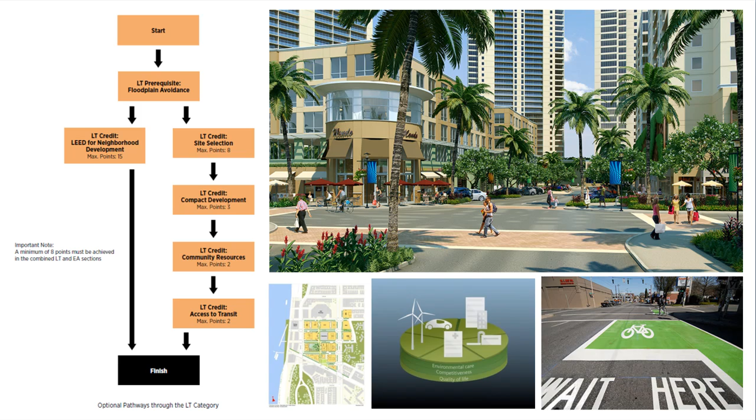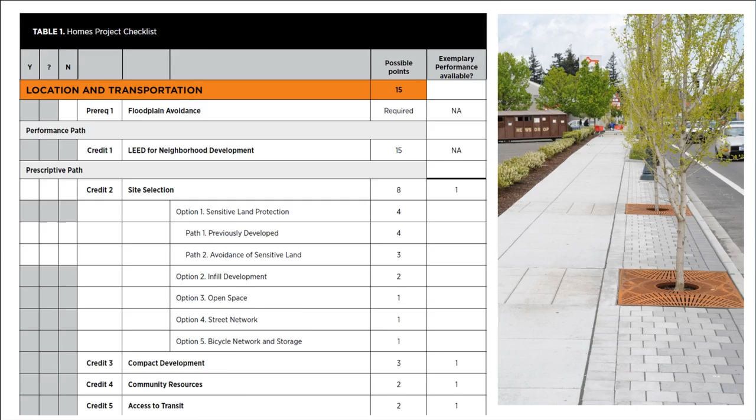This is the Homes project checklist for location and transportation. It has 1 prerequisite and 5 credits. Now we will start with prerequisite 1, the floodplain avoidance. Floodplain avoidance. Intent: to reduce the environmental impact of the development footprint. It is prerequisite or required.

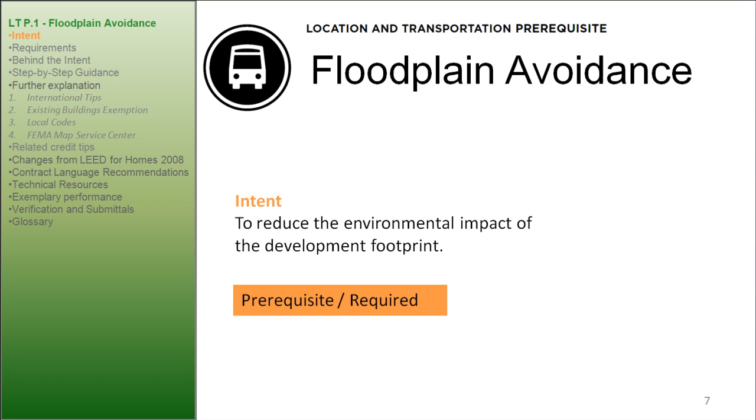Requirements: do not develop buildings on land that lies within a flood hazard area shown on a legally adopted flood hazard map, such as the Federal Emergency Management Agency or FEMA 100-year floodplain, or otherwise legally designated by the local jurisdiction or the state, unless the building is designed and built in accordance with the flood provisions of the applicable building code, the local floodplain management regulations, or at a minimum, the National Flood Insurance Program requirements.

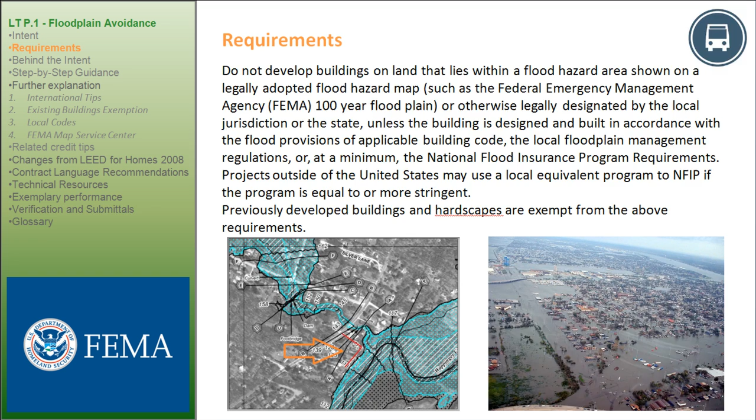Projects outside of the United States may use a local equivalent program to NFIP if the program is equal to or more stringent. Previously developed buildings and hardscapes are exempt from the above requirements. This is the example of Presidential Disaster Declarations from FEMA.

Behind the intent: flood damage causes long-term durability issues and diminishes indoor environmental quality. The restoration and reconstruction of damaged buildings generate large amounts of waste, and demolished buildings squander resources while adding to landfills. Floodplains also provide important ecosystem services and habitat.

The prerequisite encourages the complete avoidance of floodplains due to these important ecosystem benefits, but acknowledges the need for a solution when avoidance is infeasible. In this case, properly designing homes to resist flooding is required.

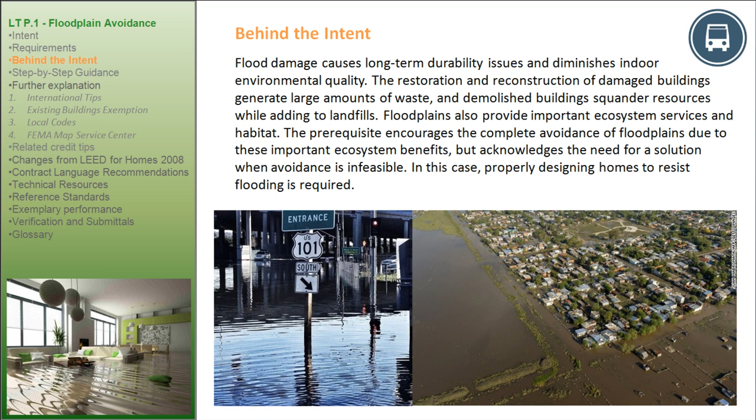Step-by-step guidance. Step 1. Map floodplain. Determine whether the site is in a 100-year floodplain, also known as a 1% flood, or in another legally adopted flood hazard area, such as an area of special concern designated by the municipality or state. In the U.S., the Federal Emergency Management Agency or FEMA maps most areas subject to a 1% annual chance of flooding.

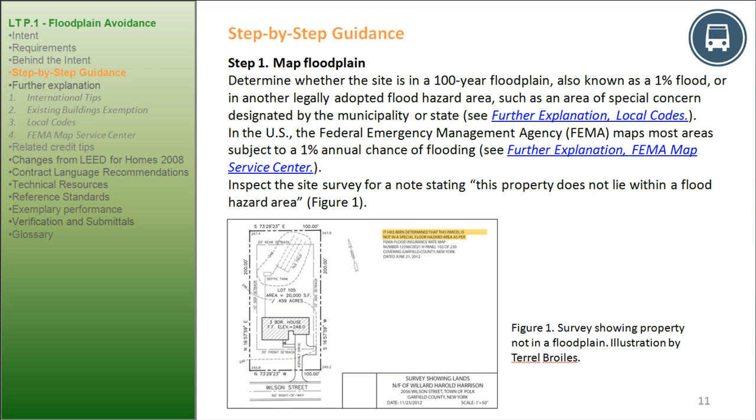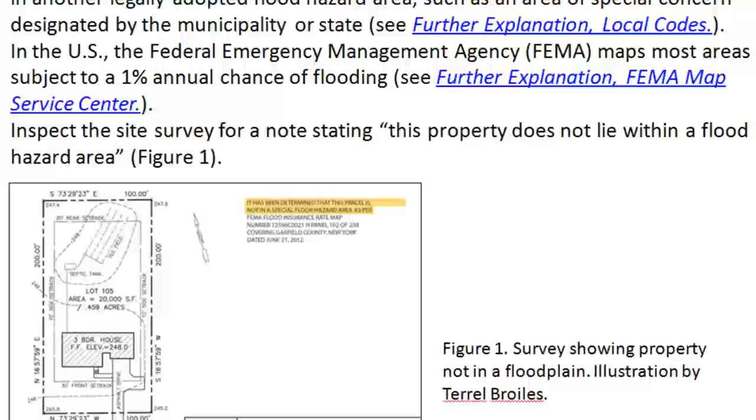Inspect the site survey for a note stating this property does not lie within a flood hazard area. See Figure 1. Figure 1 is a survey showing property not in a floodplain. Illustration by Terrell Broyles.

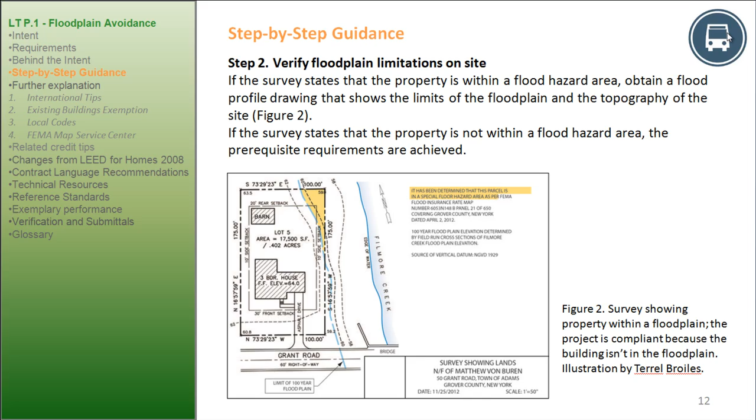Step 2. Verify floodplain limitations on site. If the survey states that the property is within a flood hazard area, obtain a flood profile drawing that shows the limits of the floodplain and the topography of the site. See Figure 2. If the survey states that the property is not within the flood hazard area, the prerequisite requirements are achieved. Figure 2 shows a survey showing property within a floodplain.

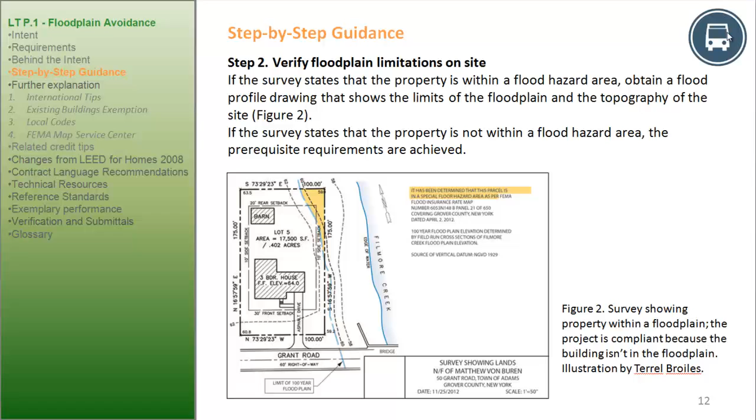The project is compliant because the building isn't in the floodplain. Illustration by Terrel Broiles. Step 3. Within floodplain: design for flood resistance. Strategy is to raise all finished floor areas and mechanical and electrical equipment above the floodplain. All spaces at or below the floodplain must be non-habitable areas that can withstand flooding.

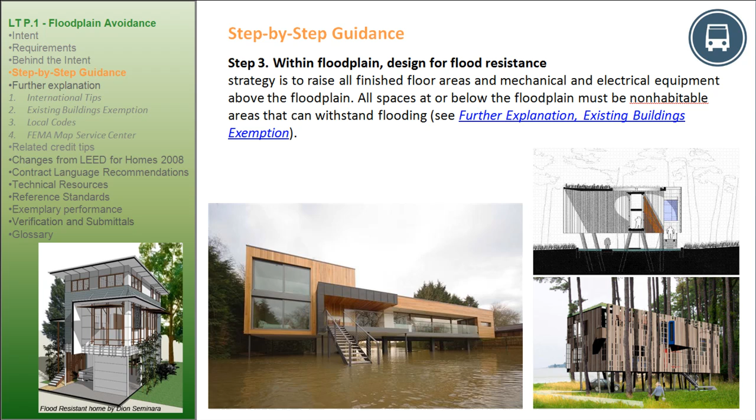See further explanation, Existing Buildings Exemption. We will now proceed to further explanation. International tips. FEMA is administered by the U.S. federal government. Projects outside the U.S. can use an equivalent program administered at the national level.

Projects are encouraged to use ASCE 24, which is applicable to projects outside the U.S. Project teams may need to retain local civil engineers or hydrologists who are licensed or certified to delineate floodplain boundaries. Most local, regional, or state jurisdictions, both inside and outside the U.S., maintain flood hazard maps. Projects outside the U.S. may refer to existing up-to-date flood maps for their project area or create their own maps based on expert information.

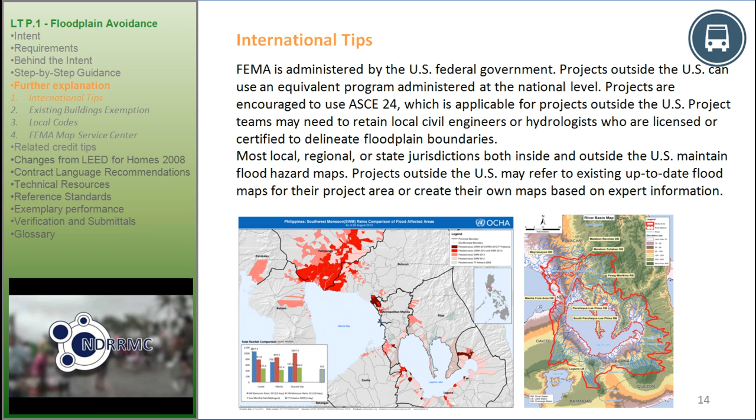Still on further explanation, Existing Buildings Exemption. Existing buildings located in a floodplain are exempt from the prerequisite requirements. USGBC recommends but does not require that existing buildings in floodplains elevate the finished area above the floodplain through one of the three following actions.

1. Extend the walls of the house upward and raise the lowest floor. 2. Convert the existing lower area of the house to non-habitable space and build a new second story for living space. And 3. Lift the entire house with the floor slab attached and build a new foundation to elevate the house. See the FEMA guide Above the Flood: Elevating Your Flood-Prone House.

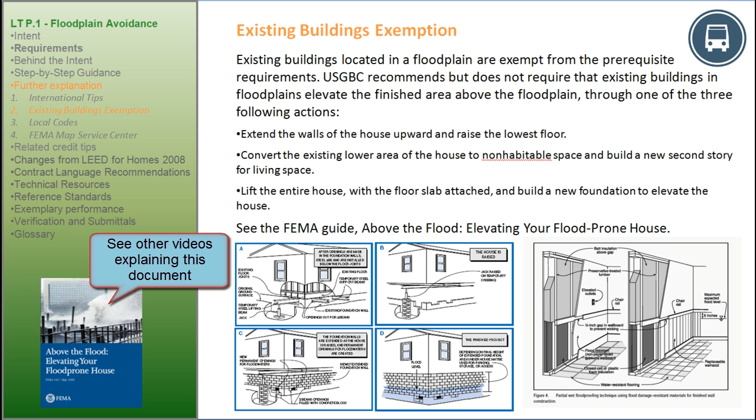Still on further explanation, local codes. Local jurisdictions have specific requirements for building in or near floodplains. This may include placing finished floor heights 4 feet or 1.2 meters or more above the base flood elevation and not installing any mechanical or electrical equipment below that elevation.

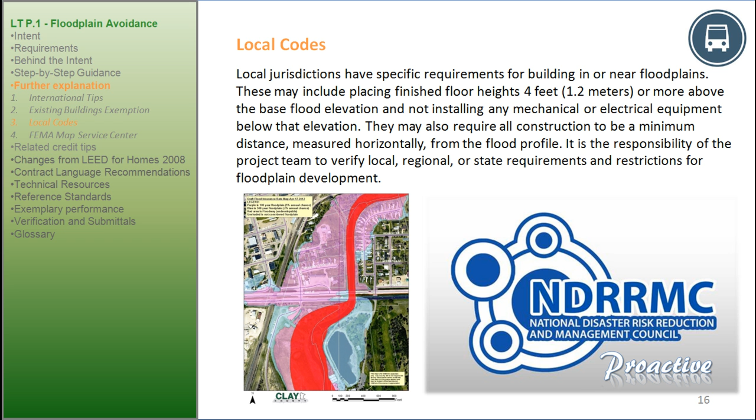They may also require all construction to be a minimum distance measured horizontally from the flood profile. It is the responsibility of the project team to verify local, regional, or state requirements and restrictions for floodplain development.

Last on further explanation, FEMA Map Service Center. FEMA provides flood hazard maps at msc.fema.gov. Search by address, then identify the classification for the project. The zone listings are accurate as of January 1, 2013.

If the project zone begins with A or V, for example A, AE, AO, A11, V1, it is below the 100-year floodplain. If the project zone begins with B, C, or X, it is above the 100-year floodplain. Zone D identifies areas of undetermined flood risk. The team must find additional information to determine whether additional flood-resistant design will be necessary.

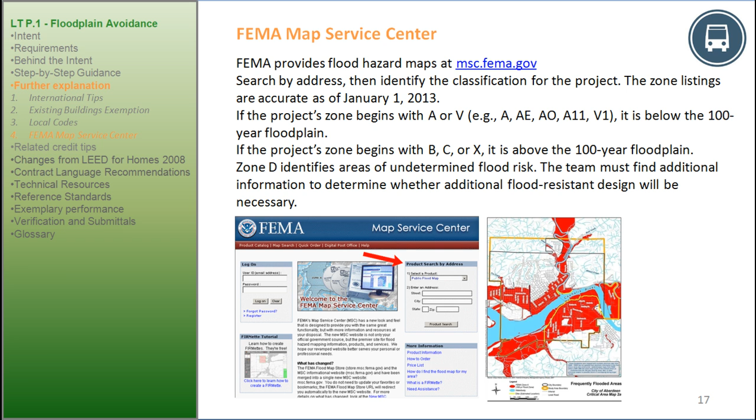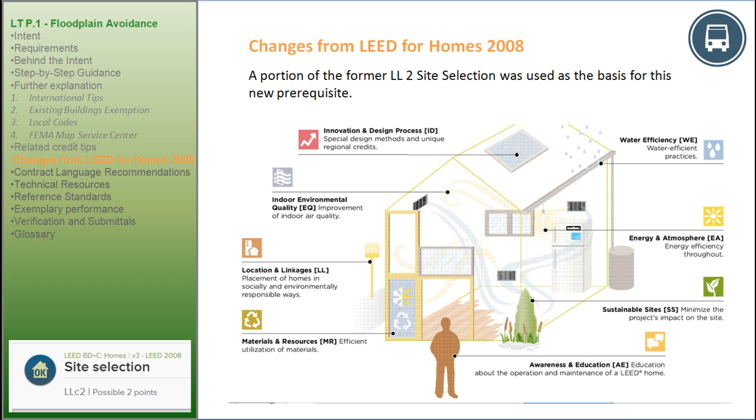Related credit tips. LT credit Site Selection. This credit contains an option that precludes any development within a flood hazard area, in contrast to the prerequisite, which allows such development if it meets the requirements of the National Flood Insurance Program. Changes from LEED for Homes 2008. A portion of the former LL2 Site Selection was used as a basis for this new prerequisite.

Contract language recommendations, none. Technical resources. Above the Flood: Elevating Your Flood-Prone House, Federal Emergency Management Agency. You can go to fema.gov/library. FEMA Map Service Center with their phone number 877-336-2627, or you may go to msc.fema.gov. Reference Standard, the National Flood Insurance Program.

Exemplary performance, not available. Verification and submittals, supporting verification materials made available by the project team. Provide floodplain map that demonstrates project is above floodplain. Provide details on how the National Flood Insurance Program requirements have been met, or provide photo documentation that project is built on foundation of previously developed building.

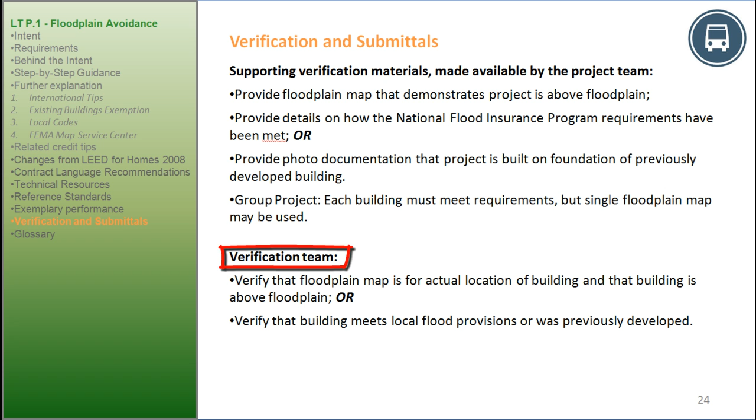Group project. Each building must meet requirements, but a single floodplain map may be used. For verification team, verify that floodplain map is for actual location of building and that building is above floodplain. Or verify that building meets local flood provisions or was previously developed.

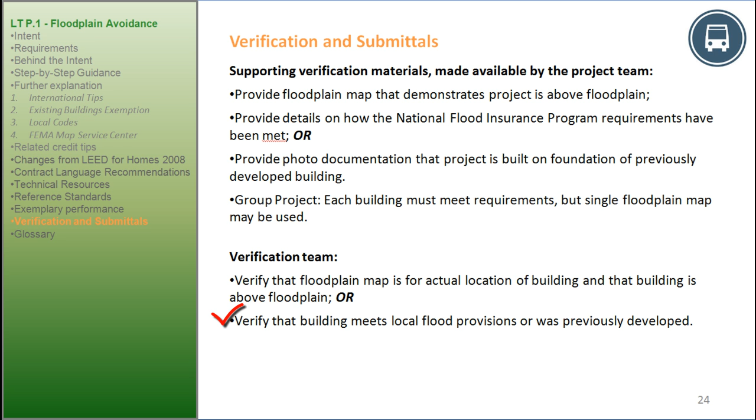Glossary or definition of terms. Development footprint: the total land area of a project site covered by buildings, streets, parking areas, and other typically impermeable surfaces constructed as part of the project. Previously developed: altered by paving, construction, and/or land use that would typically have required regulatory permitting to have been initiated. Alterations may exist now or in the past.

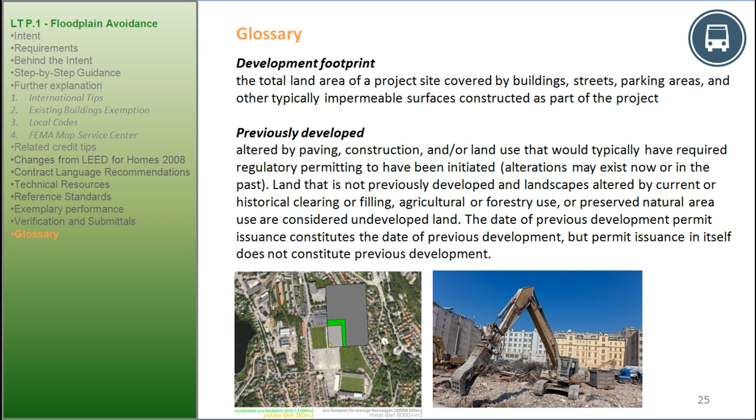Land that is not previously developed and landscapes altered by current or historical clearing or filling, agricultural or forestry use, or preserved natural area use are considered undeveloped land. The date of previous development permit issuance constitutes the date of previous development, but permit issuance in itself does not constitute previous development. This is now the end of part 3.